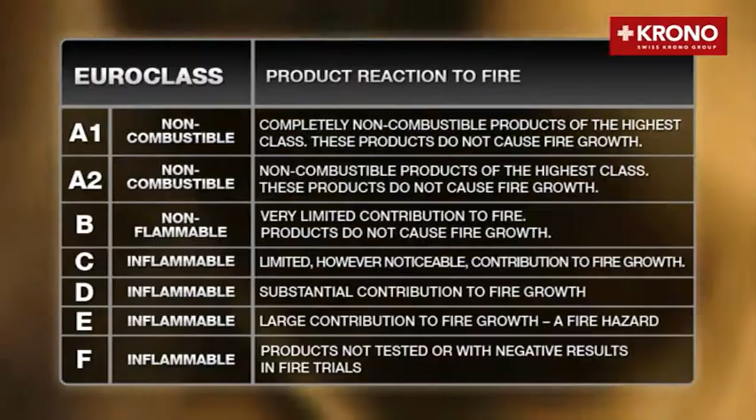The best and the safest products are included in Euro classes A1, A2 and B. Further classes, up to F, include materials of worse fire performances. Swiss Krono products are included in Euro class B. Main criterion of assigning products to particular classes is the amount and rate of heat emission.

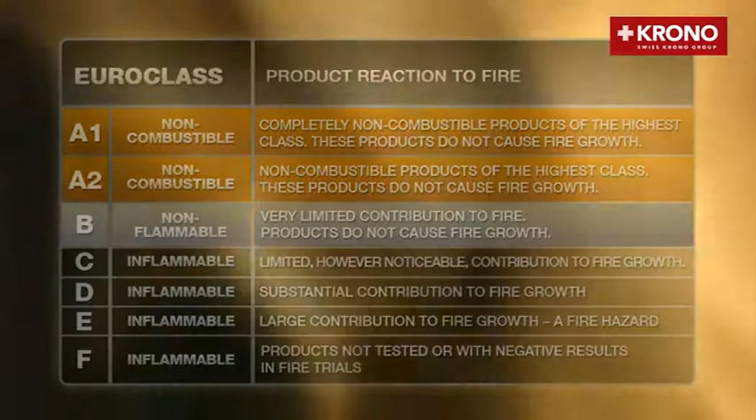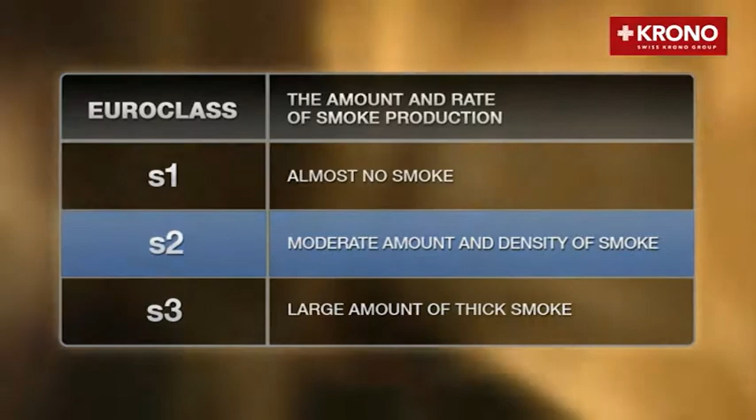2 additional classes complete the classification. These are smoke production and flaming droplets and particles. Regarding smoke production, Swiss Krono OSB boards obtained class s2. And regarding flaming droplets and particles, the OSB boards obtained d0 class.

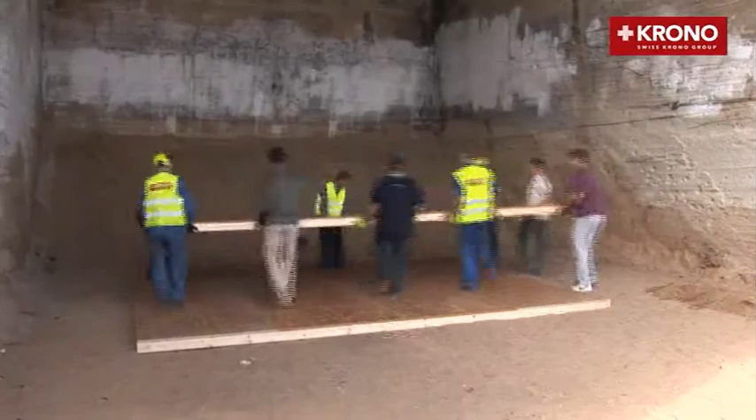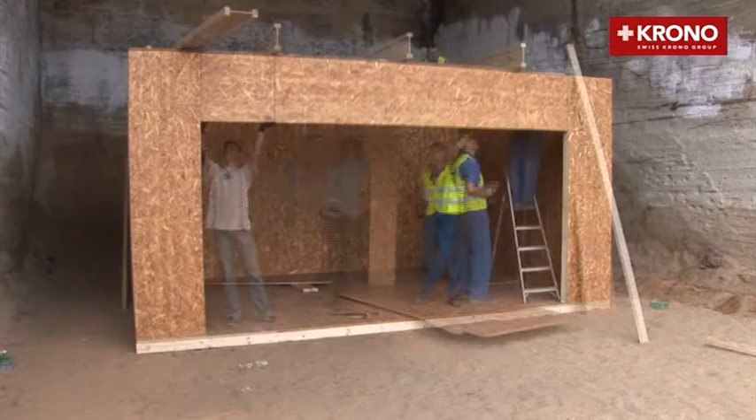In order to show the resistance of Swiss Krono wood-based non-flammable OSB boards to fire, fire trials were carried out using standard and non-flammable OSB. For trial purpose, 2 office rooms were set up. The first room was built of Swiss Krono non-flammable OSB. The second room was built of standard OSB.

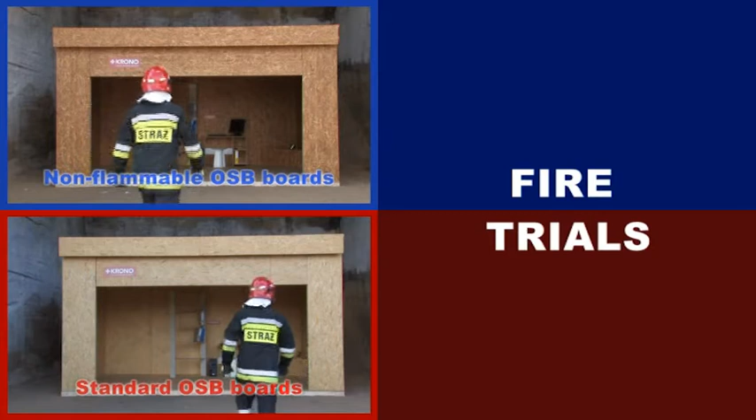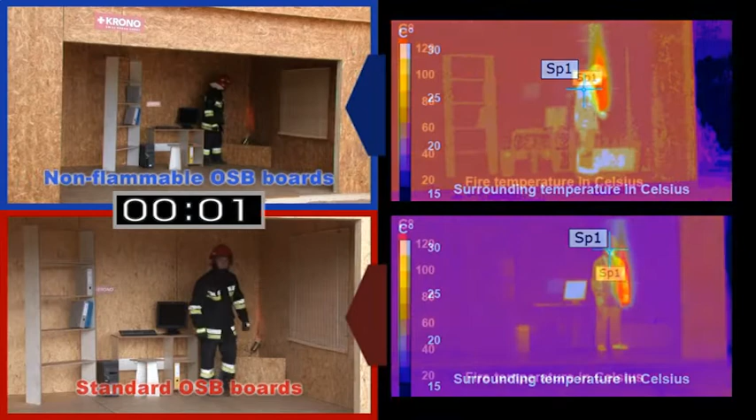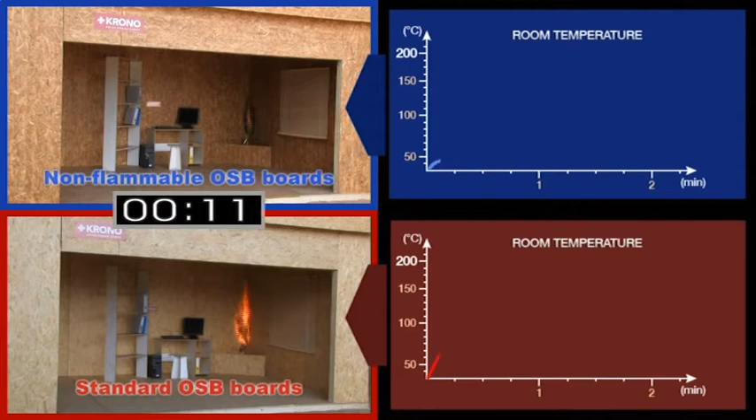Standard OSB boards begin to burn. Flames spread quickly and reached a corner of a room.

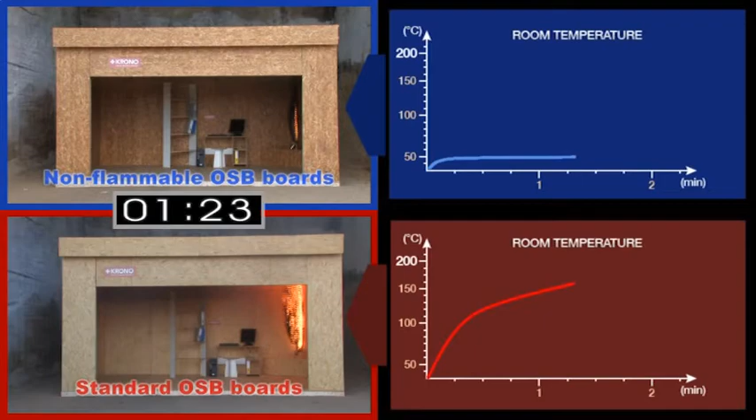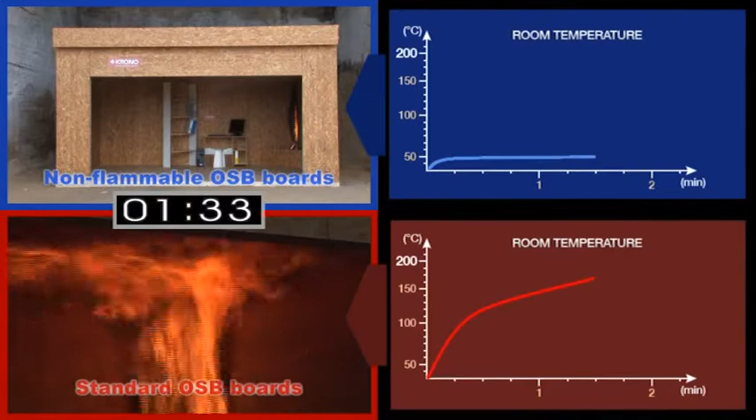Let's look at the screen showing the standard OSB test. The fire has moved to the outer side of the model and keeps spreading. Temperature in the room is growing. It can be noticed that non-flammable OSB remains unaffected despite constant exposition to fire. Temperature slightly rises.

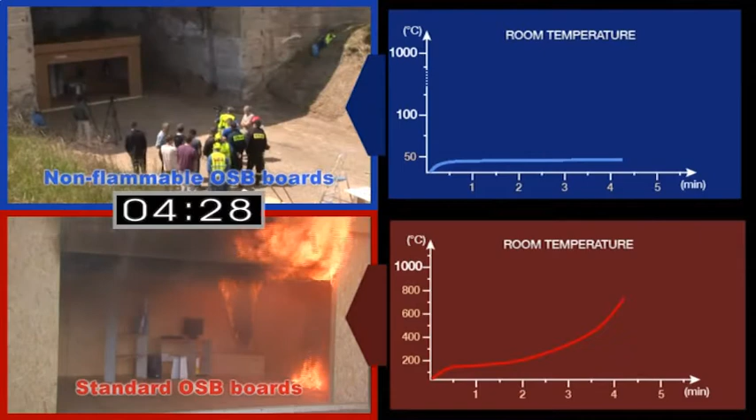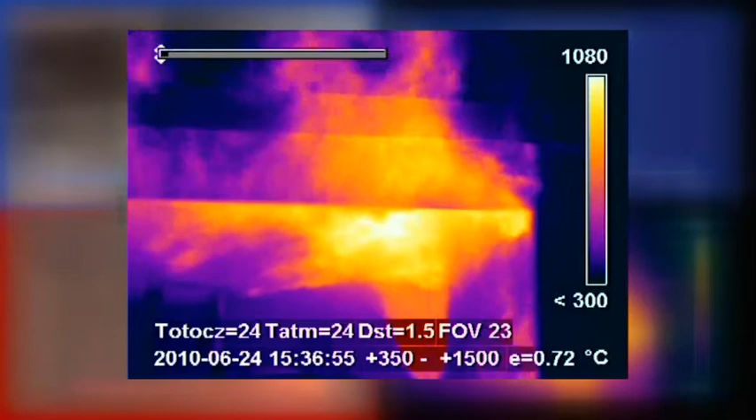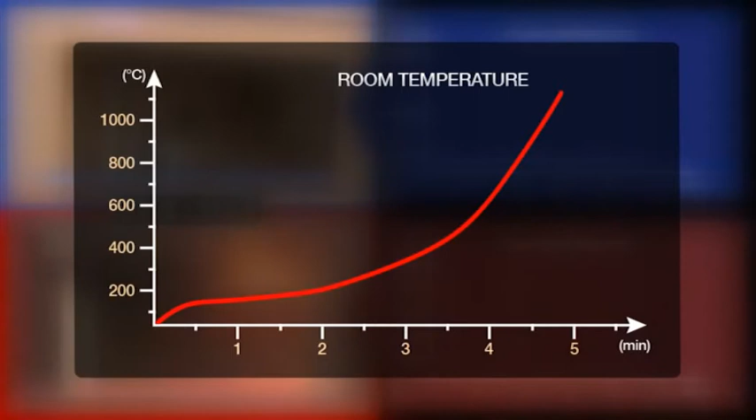Thermovision photos and the chart clearly show that the temperature constantly rises in the room made of standard OSB boards. After a relatively short time, sudden explosion of flames takes place, and mixture of gases sets itself alight. Temperature at the time of the blow exceeds 1000 degrees Celsius. The fire spreads and destroys the entire construction. Firemen enter the scene to extinguish the fire.

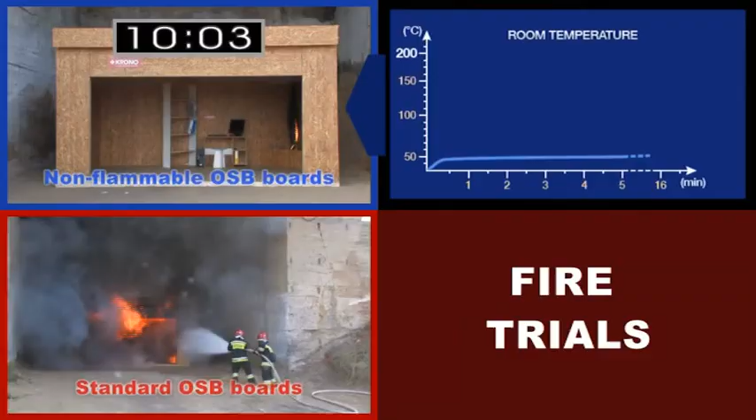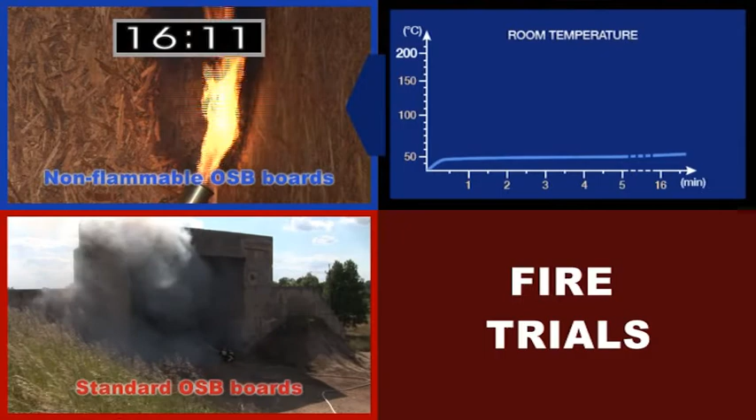The room made of standard OSB boards is burnt completely. In case of non-flammable OSB boards, only the outer layer of the non-flammable OSB was carbonized, creating a safe shell protecting it from fire. The fire does not spread. The flame goes out when the burner is turned off.